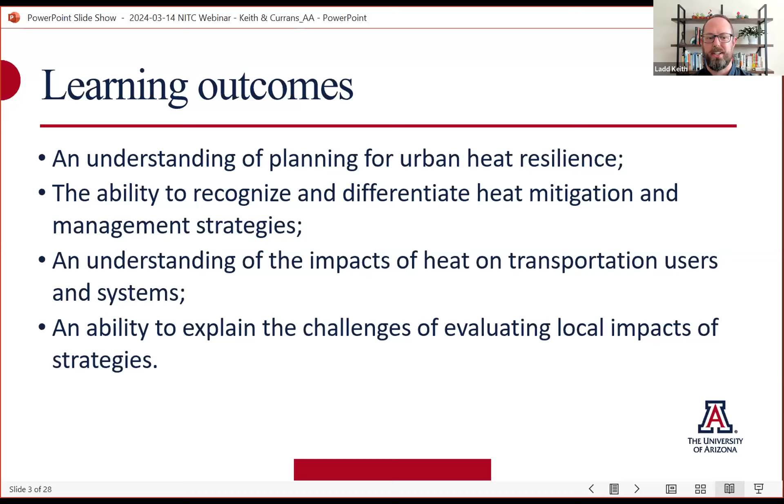Our learning outcomes: what we hope that everyone takes away from this presentation today is an understanding of planning for urban heat resilience, the ability to recognize and differentiate different heat mitigation and management strategies, and also a more complete understanding of the impacts of heat on transportation users and systems, and an ability to explain the challenges of evaluating local impacts of those strategies. That's the focus of our NITC funded project.

To kick things off, extreme heat is one of our major climate risks that we see increasing with climate change and urban heat island effect. It impacts a wide swath of social, economic, and environmental systems in our cities, all the way from public health to quality of life, the economy, energy and water use, infrastructure and urban systems, landscapes, agriculture, and on the outskirts of our cities, rural communities and our natural landscapes too.

On the right-hand side are some headlines from last year's record-breaking temperatures. It was the hottest year on record across the globe. But here in Arizona there were lots of impacts: record-breaking heat deaths unfortunately, lots of our saguaros were toppling due to the heat, and also impacts on our agricultural systems.

To focus in on a couple of these in more depth, looking at the public health impacts of heat, heat is the #1 weather-related cause of death in the United States above all of the other climate hazards that we have. And even though it's the #1 weather-related cause of death, it's also widely acknowledged to be underreported. Arizona actually has a fairly sophisticated way of tracking those heat-related illnesses and deaths, but many other states are trying to catch up to that right now and don't accurately represent those numbers currently.

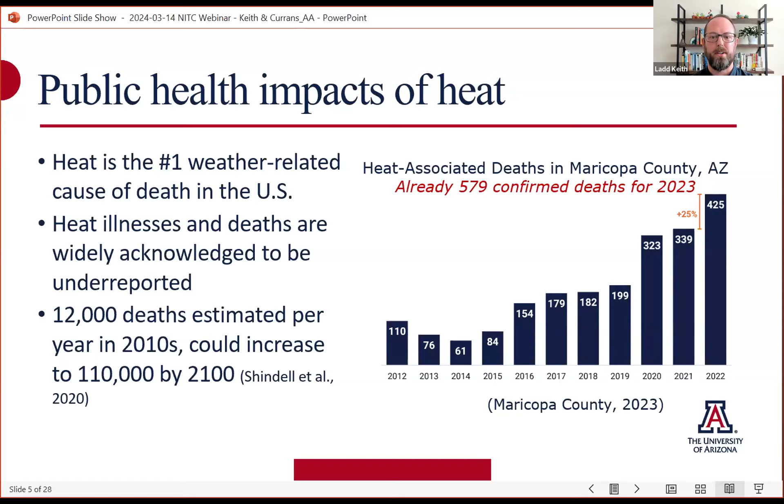Extreme heat also has substantial economic impacts. Nationally, heat already results in $100 billion of economic losses per year. That's anticipated to double by 2030 to $200 billion, and go up to $500 billion by the year 2050. So it's a huge economic strain on our nation.

That's related to labor safety and productivity, economic development efforts, tourism, and increased costs to healthcare, energy, water, and infrastructure. Focusing on Phoenix, since it's so well studied for these impacts, extreme heat in the Phoenix metropolitan area alone already causes an average annual economic loss of between 1.9 and 2.3 billion dollars, and that's if no further action is taken. So it's a substantial loss for some of these metropolitan areas alone.

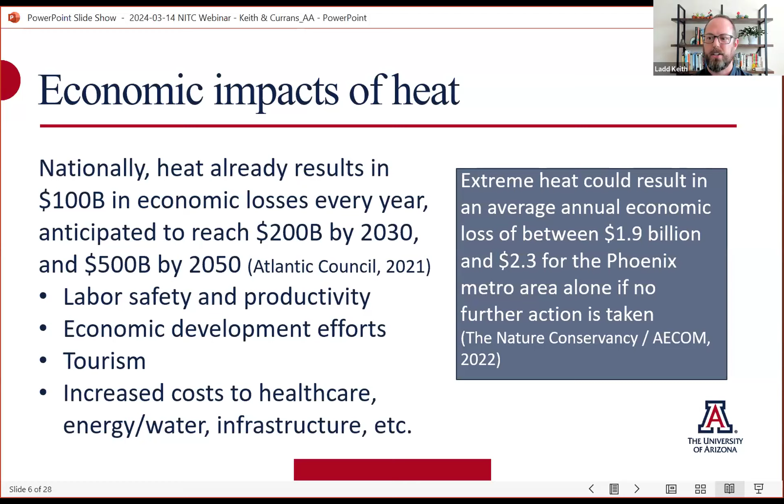Focusing on transportation specifically, transportation infrastructure is impacted by heat in terms of functionality, lifespan, and maintenance. As many attendees will know, we have different standards across the United States for the thresholds that transportation infrastructure is built to.

Here in Arizona, infrastructure is built to a high heat standard, but in many other places that standard has historically not accounted for extreme temperatures. That differential is what causes problems when we get record-breaking heat waves, like what occurred with the Pacific Northwest heat dome—light rail or streetcar lines melting, roads buckling, and things like that. As we see these extreme heat events increase in the future, we'll see those impacts to infrastructure built for lower temperature thresholds increase as well.

And it's not just the infrastructure—we're also interested in transportation mode choices and how heat impacts the types of transportation people choose to use, and the health and safety particularly of active transportation users: those walking, bicycling, or using transit, who are actually outside and exposed to the heat.

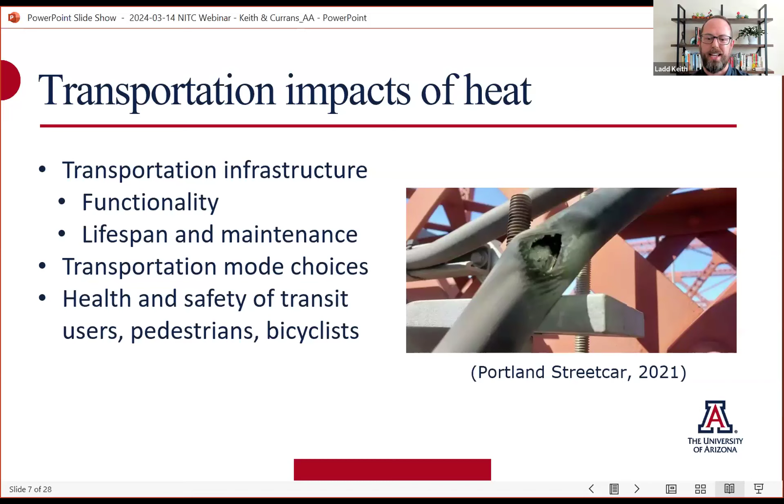As has been mentioned, heat is an increasing climate risk. What we're seeing with climate change is an increase in the intensity, duration, and frequency of extreme heat events, along with a continual rise in average temperatures. So we're looking at a chronic increase in normal temperatures, but also, as you can see on the right-hand side of the graph with that brighter red color, those chronic increases in average temperature put us into new thresholds for record-breaking hot temperatures, beyond what we've ever experienced in many places.

This is due to natural weather variation—even without the impact of human-caused climate change, we would have hotter days and colder days, but climate change is supercharging those hotter days. Additionally, the way we build and plan cities and how we operate them contributes to the urban heat island effect. So we have all three of those things working together to push us into new temperature thresholds.

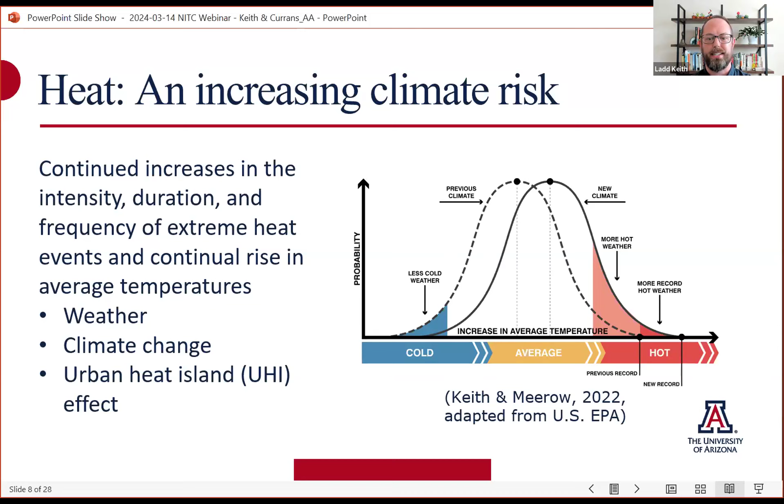The urban heat island effect is how we plan, design, and operate cities, which makes them typically hotter than natural or rural areas. This is due to land use and land cover change, but also urban form—how we plan and design cities, things like building height, density, and arrangement, and the types of building materials and reflectivity we use. That's why cool pavement is a hot topic right now—lightening up colors so they absorb less heat and reflect more of the sun's energy.

Also contributing are changes in vegetation and humidity. And this is not as well known, but waste heat emissions are a really large contributor to the urban heat island effect too. Thinking of our transportation systems, traditionally powered by gasoline and diesel, all of those waste heat emissions from engines running contribute quite a lot to the urban heat island effect. And of course, air pollution traps a lot of that heat inside our urban areas as well.

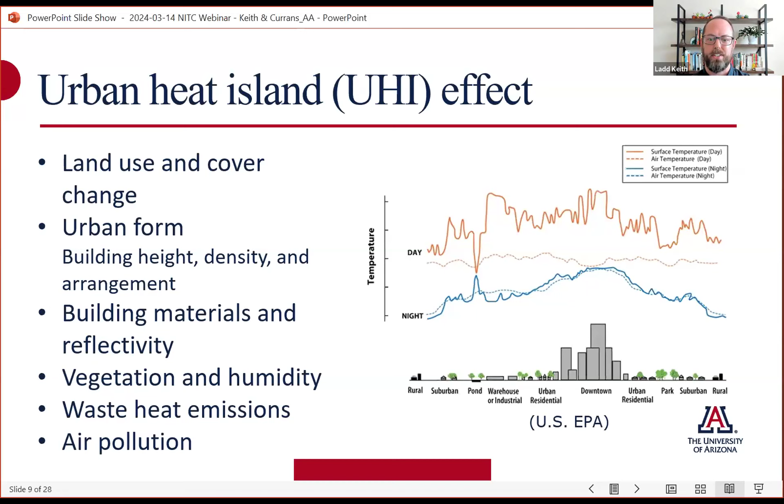Heat is both a chronic and an acute climate risk.

Just pointing out again, we have some record-breaking events like the Pacific Northwest heat wave in 2021 that really went beyond the norms of what had ever been experienced before. So that's one type of event—these record-breaking heat waves are certainly a concern.

But we also experience here in the Southwest heat waves that increase the temperature beyond what they would normally be, but it's already hot here, right?

with no respite in between. And I'll just point out too that how we perceive these heat events is very different than how we perceive other climate hazards.

Again, that Pacific Northwest heat dome that occurred—estimates and research show that between 1,500 and maybe even 2,000 people perished during that event across the Pacific Northwest and Western Canada.

There was certainly media attention to it, but the response, both on the policy and legislative side afterwards, was much less pronounced than after something like Hurricane Katrina, where about the same number of folks died.

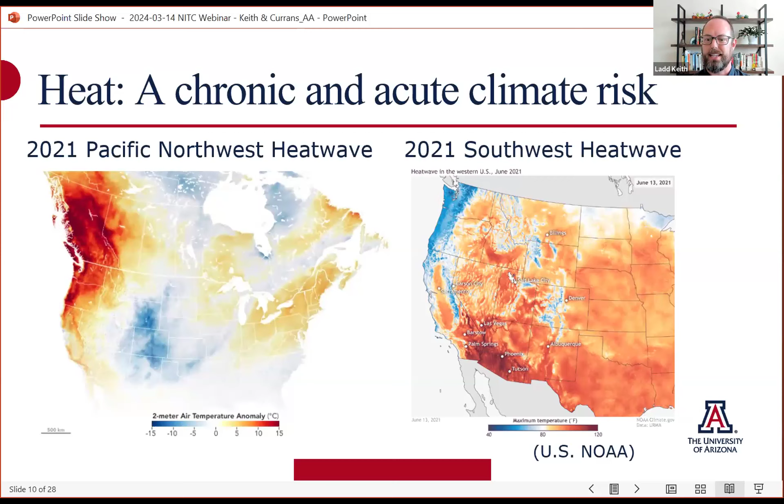So just thinking through how we think of these heat wave events versus other, maybe more visually dramatic events like a hurricane—that example of Hurricane Katrina kind of flavors our response to them.

One reason for that is, of course, heat is very complex. Dr. Currans is going to talk a little bit about this and how it impacted our study. Heat is a very complex thing to understand and study in the built environment.

That 90-degree number might be what you see on your app on your phone, or what the local weather station tells you the temperature is. What you actually feel, though, is not that 90-degree ambient air temperature.

What you experience as a human is going to depend on where you are in your built environment. If you're in an office that's cooled, you might experience that wet bulb globe temperature, which Dr. Currans will talk about a little bit later.

Again, that 90-degree number that you might see from the National Weather Service isn't really telling you what your thermal experience is going to be. That's an important part of our study that we'll explain a little bit more.

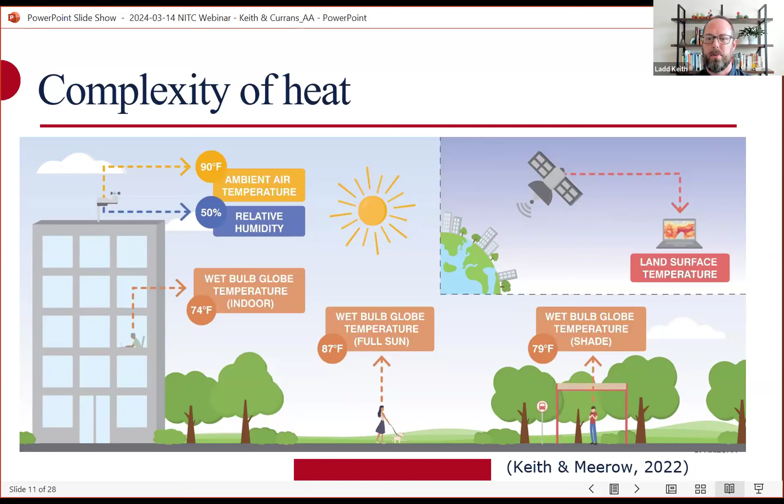Another important point is that urban heat is incredibly inequitable. Urban heat is not equally distributed across our urban areas, and this is true within the United States, but also in communities across the globe.

Lower income areas, minority neighborhoods, and marginalized communities are typically—and again this carries globally—the hottest areas in cities.

Part of that is due to historic disinvestment or racist land use practices, but also just the basics of income. If you have more money, you can afford more landscaping, and that landscaping typically cools off your neighborhood more than if you're lower income and don't have money to invest in landscaping.

Or you may not own the place that you're living in, in which case you're subject to the investment decisions of the people who own the properties that you're renting from.

So just an example from Tucson: one of our wealthier neighborhoods, the Sam Hughes neighborhood, is fairly vegetated, with some palm trees and nice desert trees. One of our lower income areas on the south side of Tucson has much less vegetation and much less shade, and that holds true across many metropolitan areas.

So it's not just the physical heat that people experience that's inequitable, but also our ability to respond to that heat—affordability and accessibility of healthcare, housing quality and choice, energy for indoor cooling, and transportation choices. The idea that you may be trapped in a certain transportation mode, or may not have options for different choices.

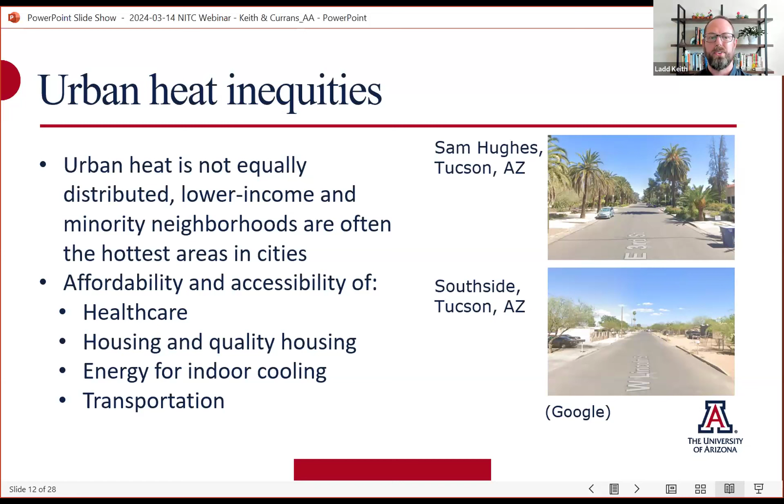If you have access to a private automobile during a heat wave, your experience is going to be much different than if your only option is to walk or bike somewhere, or if the bus stops in your neighborhood aren't fully shaded. So kind of thinking through that transportation equity aspect as well.

So with all that said, one thing I research and write quite a lot about is the idea of heat governance. With heat as a climate risk, we're really trying to call more attention to this idea that we govern heat, as mentioned before, very differently than we govern flood risk, wildfire risk, sea level rise, and drought in the United States. So really looking at the actors, strategies, processes, and institutions that guide decision-making for both mitigating and managing heat as a hazard—these really need more attention.

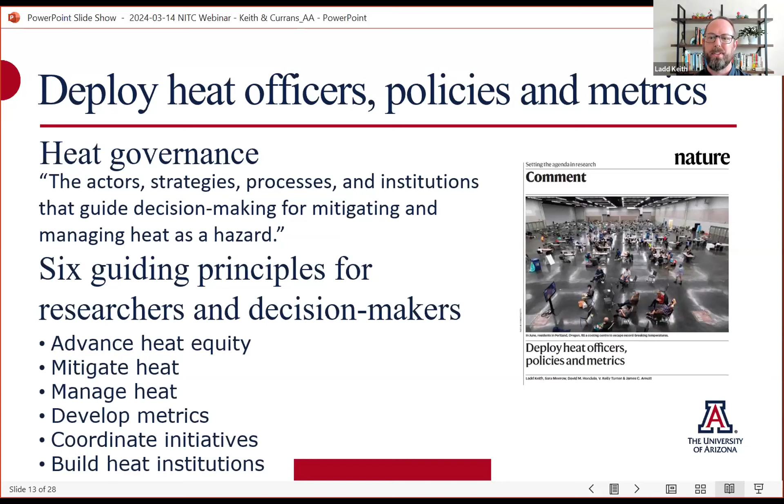And that's why the project we're going to talk about in a little more depth is really important—to provide critical information to decision makers so they understand how to act and how they can better help their communities become more heat resilient.

In this book, we talk about urban heat resilience—that idea of proactively mitigating and managing urban heat across many different systems and sectors that it affects. I'll talk specifically about some of those heat resilience mitigation strategies and heat management strategies on the next two slides.

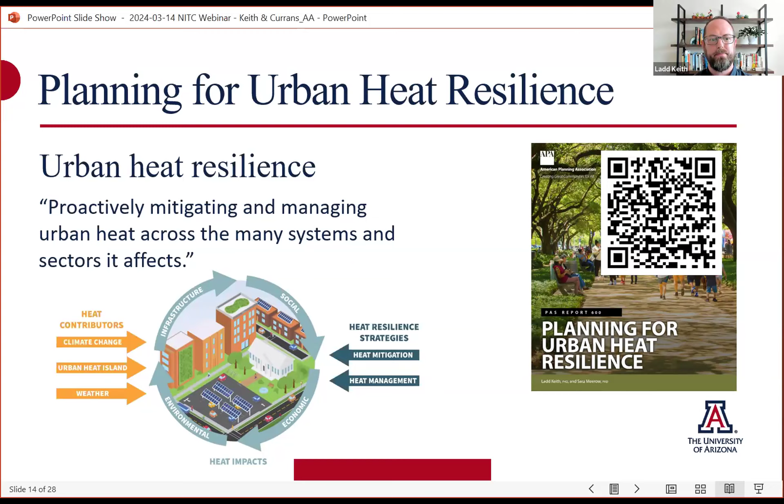The idea with heat mitigation is strategies that reduce the built environment's contribution to urban heat—really looking at how to reduce that urban heat island effect. Traditionally, this is the purview of urban planning, landscape architecture, and civil engineering—more of the built environment professions.

Heat management is the other bucket of strategies that communities are exploring quite often. Those are strategies that prepare and respond to chronic and acute heat risk—things like public health, emergency management systems, and the National Weather Service doing alerts. I'll give a couple of examples of both of these on the next two slides.

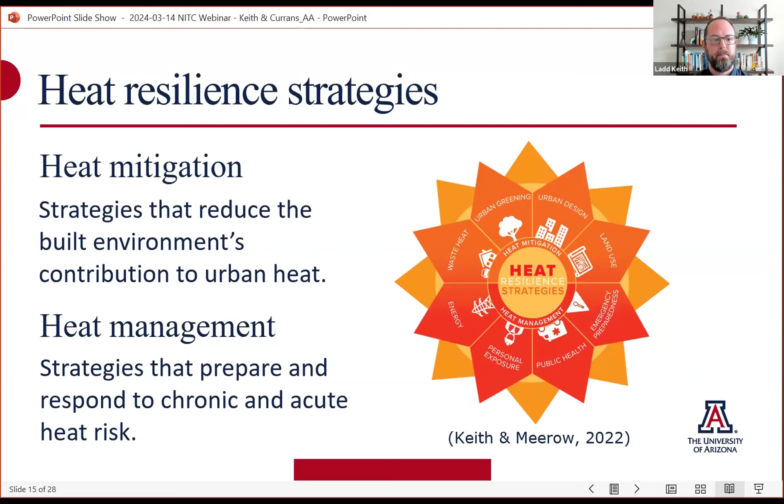Some commonly used heat mitigation strategies—these come from the book, which was informed by numerous plan analyses, surveys of planners across the United States, and interviews. They include changing land use development patterns, land conservation outside of cities to preserve areas that provide a cooling effect, and transportation systems, which can unfortunately sometimes be a very large contributor to the urban heat island effect.

Looking at the site-specific scale for urban design strategies includes things like shade structures and the use of cool materials within individual sites, as well as urban greening. One of the most popular strategies is urban forestry—increasing parks or green infrastructure in different places to make those hotspots less inequitable than they currently are.

Anything we can do to reduce waste heat—any energy efficiency gains made through building projects, including energy efficiency of buildings and vehicles—can reduce the urban heat island effect too. Electric vehicles certainly don't solve all the problems, and I know they come with their own set of issues, but they do contribute less to the urban heat island than traditionally gasoline-powered vehicles.

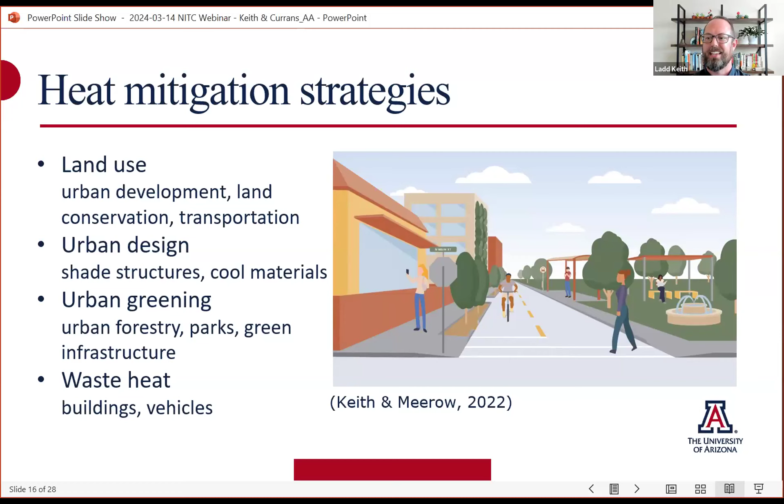Reducing automobile vehicles altogether is ultimately going to reduce that urban heat island effect as well. On the heat management strategy side, cooling centers are probably the number one strategy that a lot of cities are currently looking at—providing indoor cooled respite places for folks who don't have access to thermally safe environments during the day.

Of course, cooling centers are a band-aid for the fact that we don't have safe housing or safe workplaces for everyone in the United States. But I think a lot of folks recognize that's a really difficult problem to solve. So standing up those cooling centers while we also try to solve the affordable housing crisis and get folks safe housing is really important.

Even if you do have a house, though, oftentimes if you're lower income, it might not be weatherized properly, and you might not be able to afford your energy. So looking at how we can increase the equity for those types of things to make living spaces and indoor spaces more thermally safe.

Things like early warning systems, in partnership with the National Weather Service and cities, so they have coordinated responses when heat waves occur. And then, from the public health sector, things like heat education and awareness campaigns, so that when those early warnings happen, citizens and residents know what they're supposed to do on their own.

Occupational safety guidance and regulations is a big topic right now. OSHA is currently going through the process of including heat as one of their mandated work safety regulations, but that's going to take a couple of years. So we've seen movement from different cities and states to act on their own to make sure heat is considered. For the transportation sector, there are a lot of construction workers and traffic safety folks—this is really critical for those who work outdoors in the transportation area too.

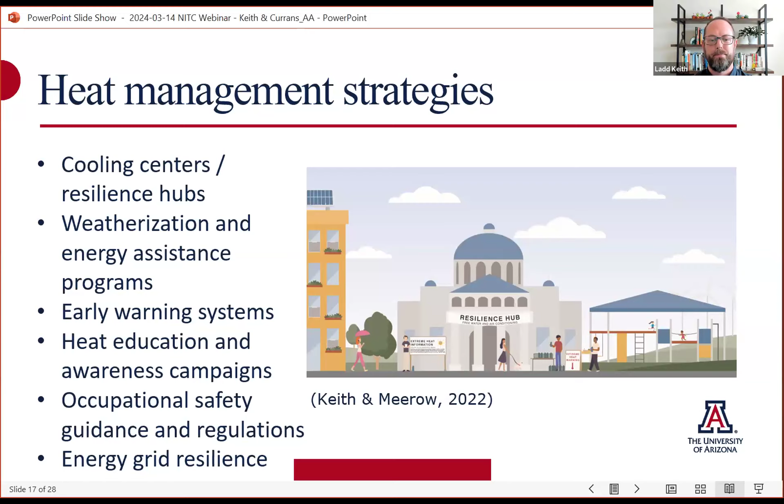The US NIHHIS, or National Integrated Heat Health Information System, is an interagency effort to address heat as a country. We also have a link to the EPA Heat Island Reduction Program, one of the longest-standing resources for cities to plan better to cool themselves off.

Of course, the 5th National Climate Assessment tells you your projections and current climate impacts depending on where you are in the United States. And then the Global Heat Health Information Network, which has a lot of really good heat health related resources and examples for cities to look at and learn from as well.

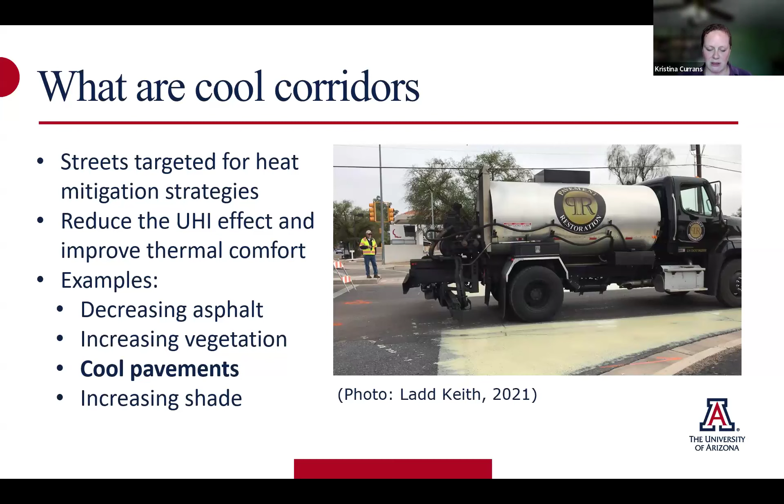Our study was really inspired by the city of Tucson's interest in piloting new plus TI pavement rejuvenator treatments and trying to determine whether the costs of these treatments reaped benefits for our community.

In many of these treatments, there are lots of lab measurements and tests, but these are very controlled circumstances. Because they act somewhat like sunscreen, often reflecting heat and radiation from the sun, we were concerned that these treatments might impact the experiences of people at a pedestrian scale along the roadway.

So our focus of this evaluation was on pedestrian scale human comfort before and after the application of our first pilot treatment. By and large, a lot of these treatments are tested for pavement longevity, thinking about ways to prevent the aging and cracking that happens on our asphalt.

So we have less of an understanding of whether, when these treatments are applied en masse in an area, they might reduce the urban heat island effect. That's a question we continue to have related to this specific treatment, but also the suite of treatments that other cities are testing and applying.

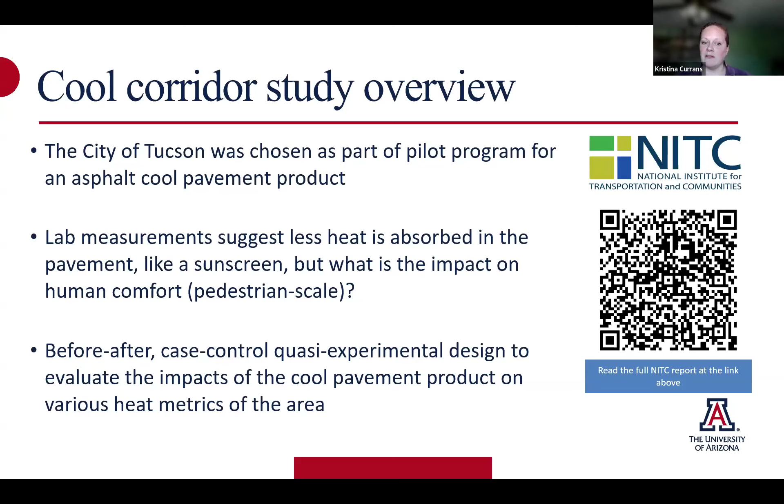The way we set up our study was a before-after case control, quasi-experimental design in the real natural environment, to evaluate the impacts of cool pavement specifically on pedestrian scale human comfort.

We took a variety of measurements, but the three primary measurements we focused on were ambient air temperature. This is typically the temperature that thermometers give us, the temperature reported in the news.

We also measured wet bulb globe temperature, which is an index that captures humidity, wind, and solar radiant heat. This is much closer to what humans, the human comfort or feel, are actually experiencing.

And then we also measured surface temperature. So at every hour, we went through and collected the surface temperature of the roadway itself, as well as the sidewalks and the surrounding environment.

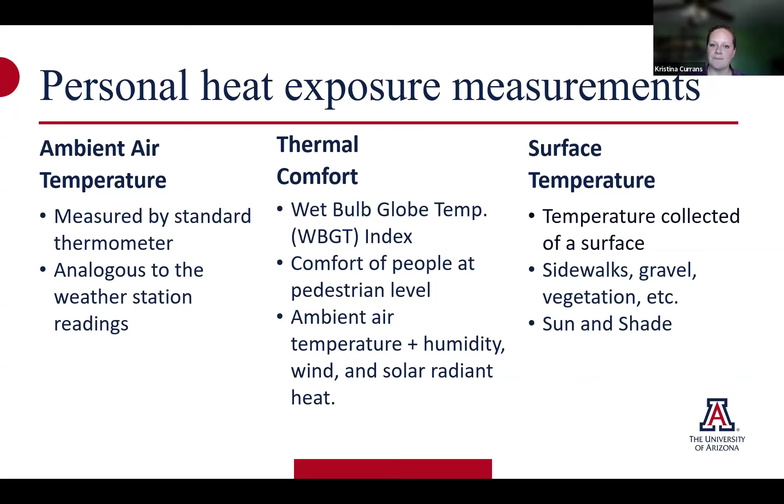The challenge of this study was that when we're not in a lab environment, it's very hard to control for microclimates and all the little variations, like people's front yards, the plants people are planting, the walls people have installed, and small features of even the right-of-way.

Including the location and materials that sidewalks are made of, for example. So we used some GIS mapping to identify specific road networks that were very similar in environment to the candidate site for the treatment the city wanted to pilot.

From that analysis, we identified three specific corridors, our treatment corridors, and our control sites. We then measured just before the application, from October 2021 to April 2022.

Those dates and time periods were selected because of the similarities in the arc of the sun path, the temperature or anticipated temperatures, and a variety of other metrics related to what we know to be our average wind, and so on.

We worked with the city because we were in the roadway. We worked with the city to also collect permits to access the site, which helped us control some of the traffic around those locations during the weekends.

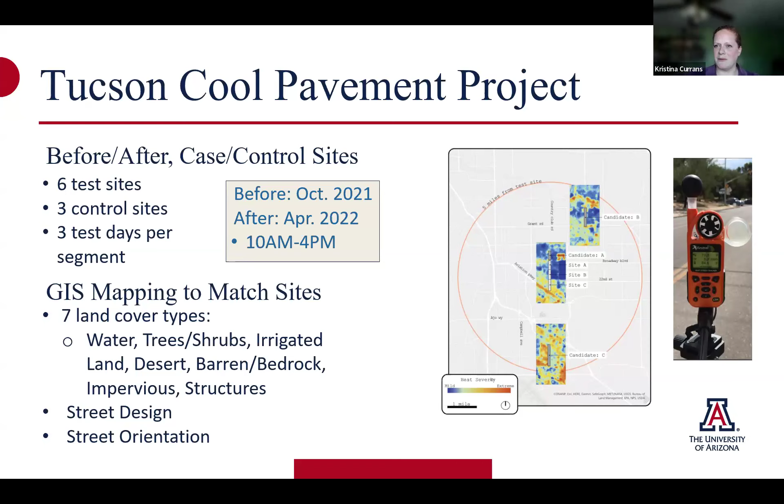In all cases, it was weekend traffic, so it was never very congested by the time we were collecting data.

In terms of our summary of findings, we do have a report out there with more specific details about how we controlled for these different things. We focused on before and after measurements of treatment only, and in these regression analyses controlled for temporal autocorrelation. Since we collected measurements every 10 seconds for an entire morning, 10 a.m. to 4 p.m., we wanted to control for that natural autocorrelation. We focused on the centerline analysis because we decided that if we were going to see a major impact on what pedestrians might experience, we'd see it at the centerline. It might be more challenging to measure at a sidewalk.

Thinking about the outcome variables: ambient temperature, and wet bulb globe temperature, which is more closely aligned with human comfort, what people feel. We found significant relationships between the impact of shade on the centerline asphalt, with only slight reductions in ambient and wet bulb globe temperature - these are in degrees Fahrenheit. We also found slight reductions in ambient and wet bulb globe temperature related to increases in wind. It's worth noting that wind never got higher than about 5 miles an hour, so it was a pretty low wind day on both days we observed.

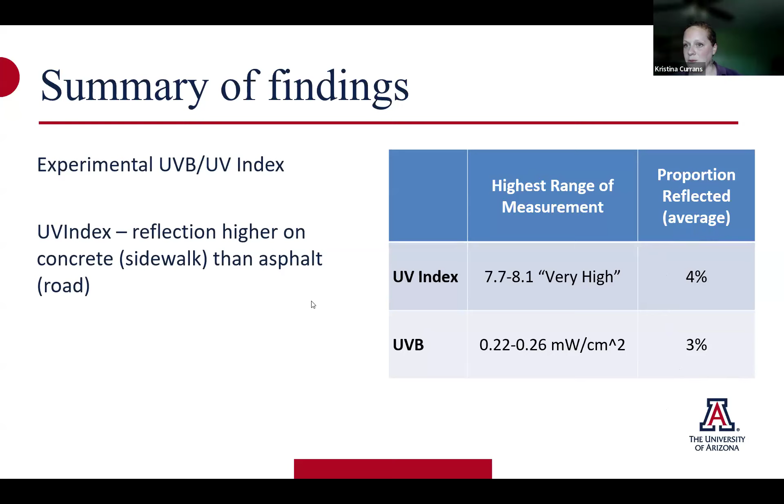During our after study, we were able to measure what we were observing coming from the sky versus coming from the ground. We found that the reflective averages were less than 5% across our measurements, and often negligible if it's not the high point of the day, around 12 p.m. So relatively small.

We also collected surface temperature information hourly. This was more manual data collection - we used temperature guns that had to manually collect on the hour at each location. We found there were a lot of complications comparing before and after surface temperatures because the sample size was so much smaller, being a manual data collection.

We also found that the microclimates in our case controls were challenging - even though we did a whole analysis to find sites very similar, one with treatment, one without, there were such small, subtle things that impacted the microclimate that the case control comparisons weren't as useful as we'd hoped. That's partly why we leaned on the before and afters, which provided a bit more control over variations in the built environment.

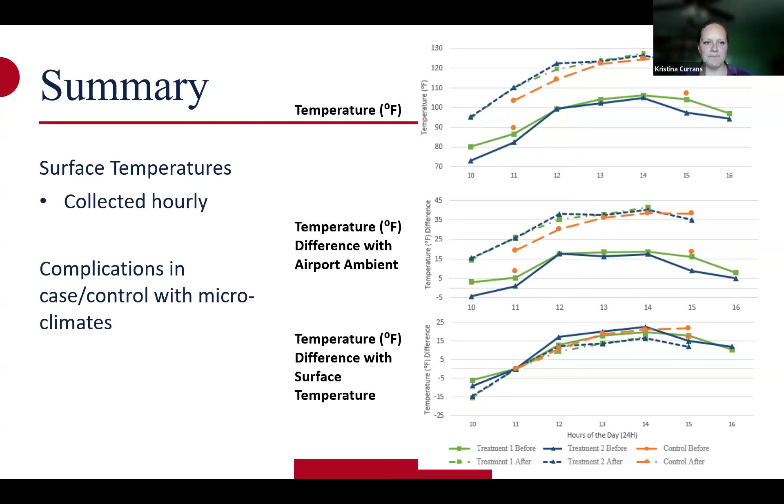But this brings up one of our concluding thoughts, which is not very conclusive. Many of these tools we're looking at for cool corridors and pavement treatments are studied heavily in the lab. But when we translate them into the actual environment, with all the variations in small plants, big plants, trees, shade, even watering schedules of neighboring areas, it can really impact what we're able to measure and control for, making our ability to observe the actual impact of these treatments in the natural environment much harder to capture and understand.

But this is a really key and important question that we need to continue to pursue because cities are spending a lot of money on these treatments. And if we're not seeing in the real world the impacts that we are estimating in the lab, something is off in the advice that we're providing.

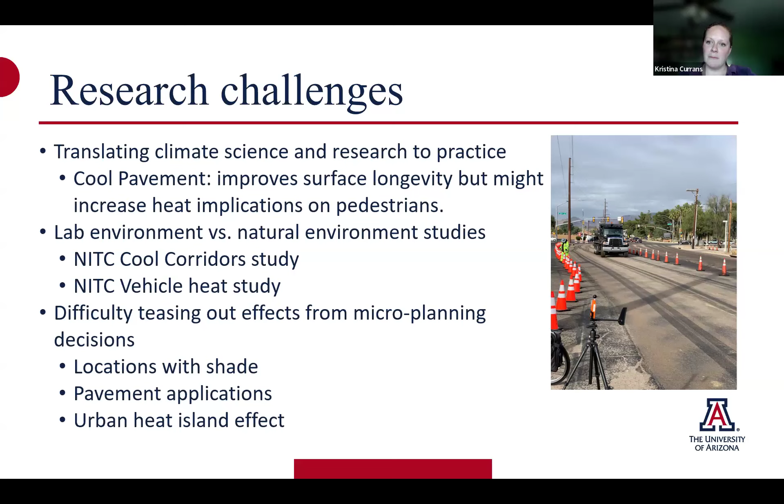We want to make sure that the treatments are actually helping us in some way. It's very possible that these treatments will still continue the surface longevity. In this case, it doesn't seem like they negatively impact the heat that pedestrian scale travelers are experiencing, but this is one of many different pavement treatments. So much more work is needed in collaboration with other types of scientists to help us understand the benefits or maybe the costs of some of these treatments.